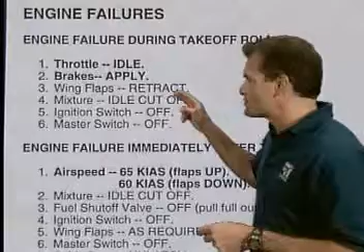If the engine failed during the takeoff roll and you're still on the runway, all you would need to do is, as the checklist says, put the throttle to idle to discontinue the takeoff. Then apply the brakes to try and stop on the runway. The rest of these checklist items are if you're going to run off the runway itself.

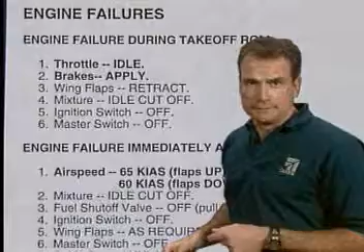Now, are you going to have time to get out the checklist, find the right page, and then do the checklist? No. That's why these first items are bold-faced memory items. But if you're going off the runway, you will need to know all of them. And here they are. Let's talk about them.

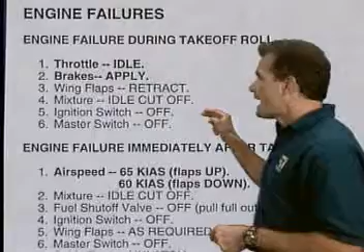Flaps up for better braking. Then secure the airplane. The mixture, ignition, and master switch should all be off. And folks, it's okay to run off the end of the runway if you have to. You can always replace the airplane.

Now let's talk about the most critical time for an engine failure, and that is right after takeoff. The reason this is most critical is that you do not have a lot of altitude to try to get the engine started or to maneuver the airplane to a favorable landing site. And you already know the ABCs of engine failure. And in this situation, following this procedure is critically important.

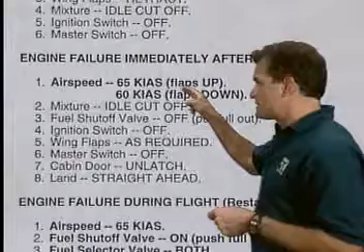A, as you know, is for airspeed. Here, as before, the airspeed is 65 knots indicated airspeed if the flaps are up, and you see it right here, and 60 knots if the flaps are down. And since you are climbing when the engine quits, you will need to get the nose down immediately. Remember your attitude. But if you do nothing else, fly the airplane at the recommended glide speed.

Now, B stood for best field. Your choices here will be very limited. You should find the best landing site somewhere in front of you, but no more than 60 degrees to either side of the nose. It may be a tough decision. Trees or buildings may be in the way. You could go between the trees, but maybe not the buildings.

If you do go for the trees, try to let the wings absorb the hits by aiming the fuselage between the trunks and keeping the cabin and passengers as safe as possible. This is a true story. A friend of mine had to do an emergency landing in the state forest in Washington, and he used his wings to absorb the impact and walked away with barely a scratch.

So it does work. And remember now, C is for cockpit checks. Use your flow procedure, and if the engine doesn't start, cut off the fuel and electrics to try to prevent a fire. And the last item is to land straight ahead.

But now you're probably asking, hey, why don't I just turn around and land on the runway? Because unless you have a lot of altitude, you will not make it back to the runway in one piece. And let's examine why. In this figure, you just took off from the airport and you've climbed to about 300 feet AGL. Remember that number, 300 feet AGL.

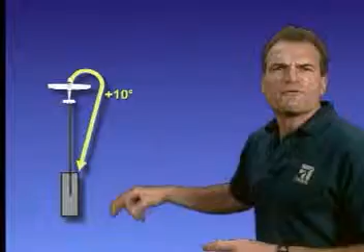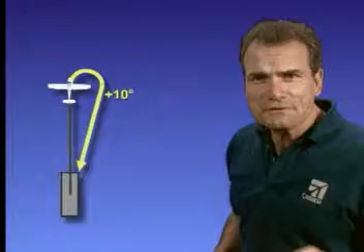Okay, let's assume you made a tight turn to get back fast, say 45 degrees of bank. Well, this would give you a turn rate of about 12 degrees per second. So a turn of 180 degrees would take about 15 seconds, and then the additional turn of 10 degrees to get headed back to the runway would take about 1 second. Plus, let's say 4 seconds for reaction time for a total of 20 seconds.

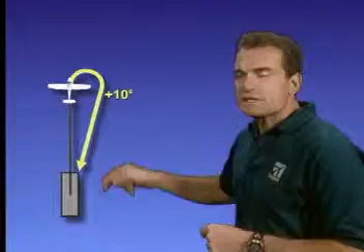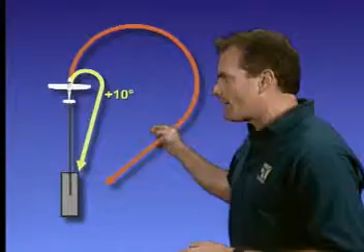In this steep bank, your descent rate has increased to about 1,000 feet per minute. So that equates to 333 feet of altitude loss. But remember, we were only at 300 feet to start with. And if you made a shallower bank turn, you'd lose even more altitude because it would take a lot longer to get around. Now, what happened to your stalling speed in the steep bank?

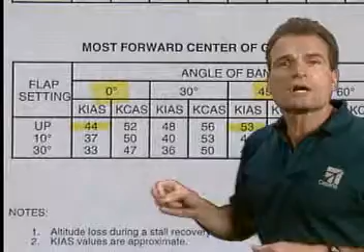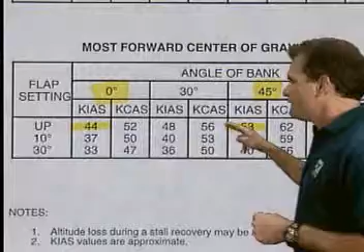Well, you know that the stall speed increases as you increase your angle of bank. So let's look at Figure 5.3 from your Skyhawk Pilot's Information Manual and see just how much in this case. As you see here, the stalling speed goes from 44 knots indicated airspeed in level flight to 53 knots indicated airspeed in a 45-degree bank.

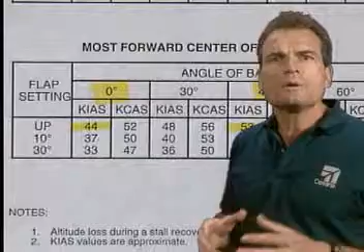So, if you pulled around the corner at 65 knots, you would be very close to the stalling speed. And if you see you're not going to make it and you pull just a little bit harder, you get a little slower and stall, the results could be disastrous. That's why the best choice is to land straight ahead like the checklist suggests.

You know, a test pilot once said, the difference between a true professional and the other pilots is that during takeoff, many amateurs are surprised when something doesn't work. And the pro is equally surprised when it does work. So if you're prepared for the engine to fail, it probably won't.